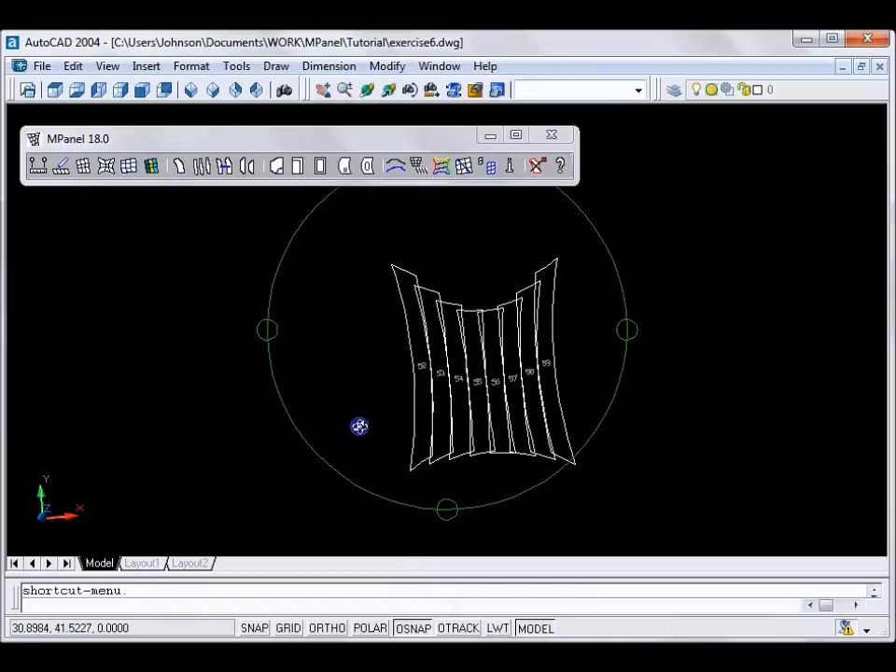In this exercise, we'll learn how to prepare a set of panels for production. We'll start with this pre-existing set of panels, and the first thing we'll do is use the Panel Arrange tool to space these panels out horizontally, with the panels oriented vertically.

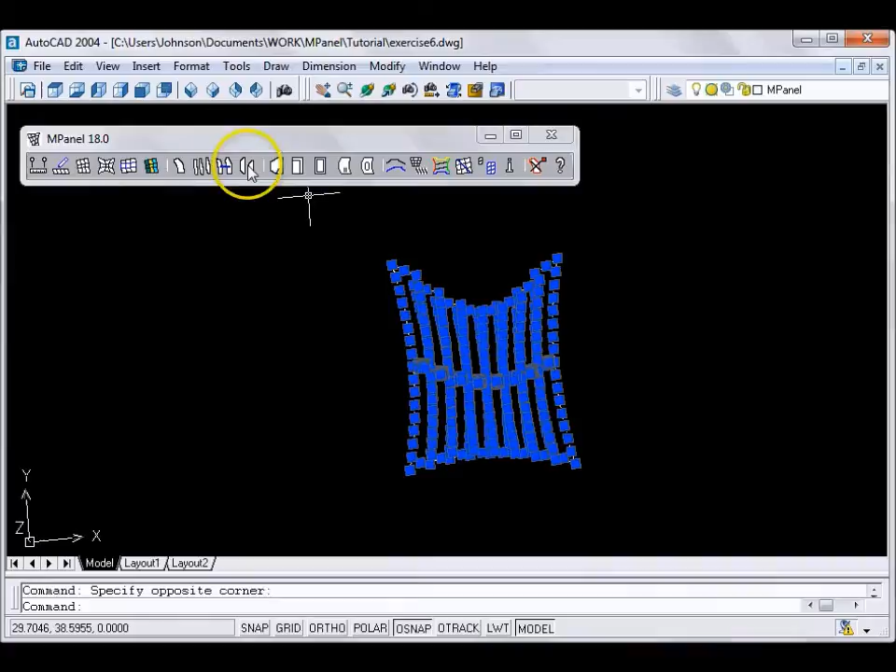We'll first go to the options under the Panel Arrange tool, and we'll specify a panel spacing value. For this example, we'll use a panel spacing of 1 meter. Click OK. Then select all of the panels and run the tool. Now we have our same panels spaced out horizontally.

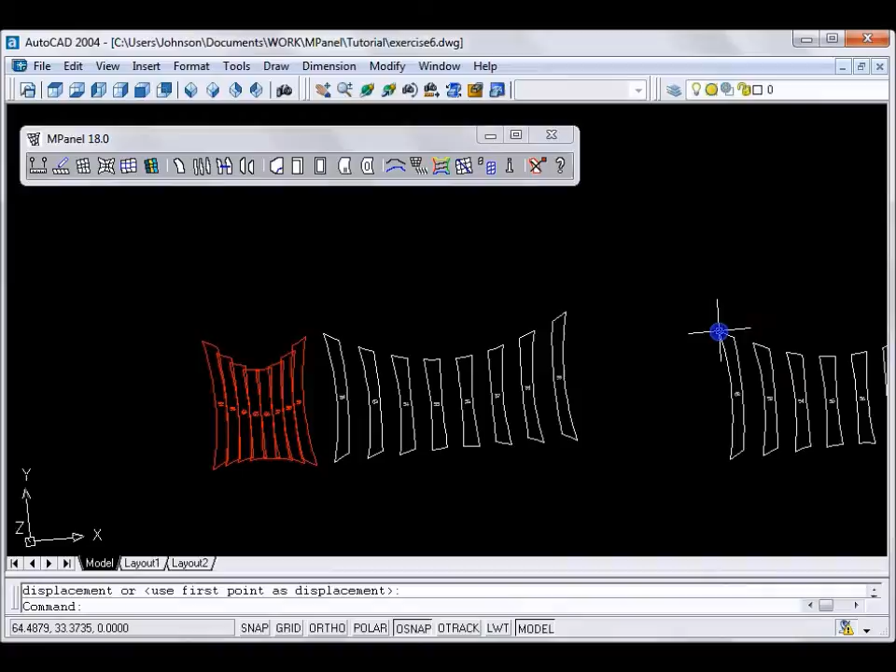Before we move on to the next step, however, we'll go ahead and make a copy of this set of panels, and we'll put it over here. And throughout this exercise, we'll continue to copy the panels after each section so that by the end we'll be able to look back at our progress step by step.

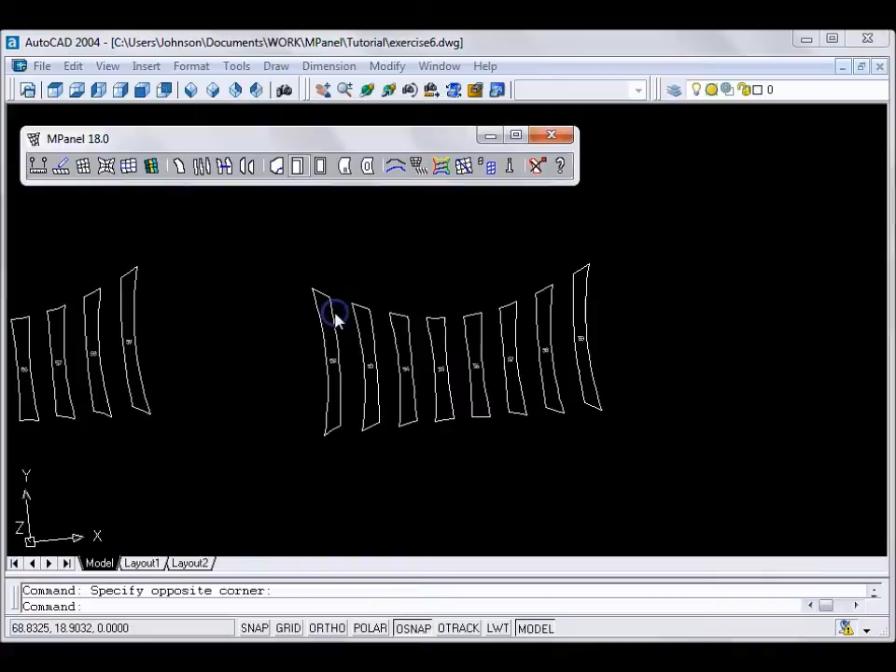Now we're going to compensate the panels using the MPanel Compensate Panels tool. This means that we'll deliberately shrink the panels so that when they are stretched to their true size, they are pre-stressed. If we don't do this, the fabric will be loose when it is installed. The amount of compensation required depends on the fabric and the pre-stress required.

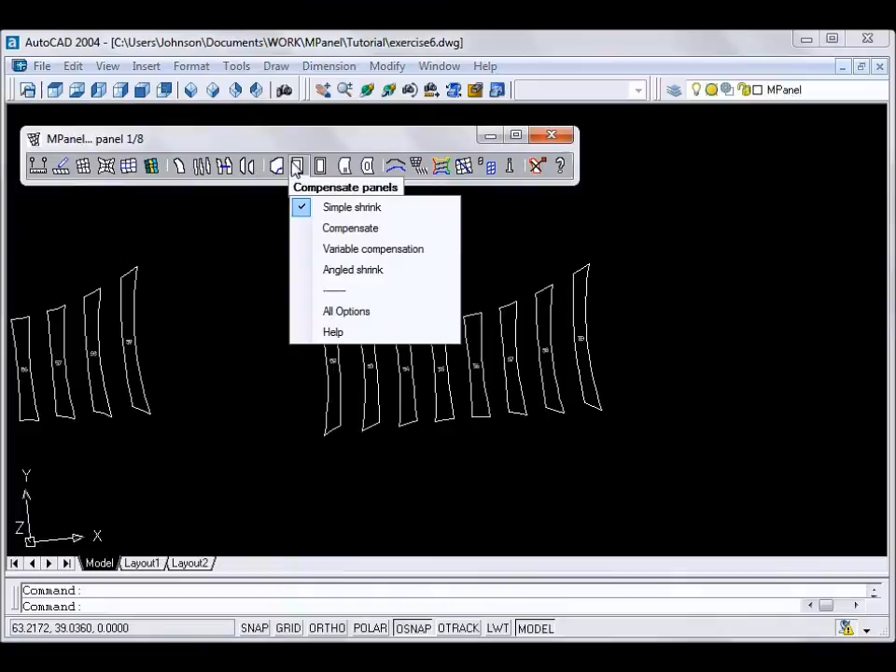Here we're specifying a 3% weft with a 3% warp and a simple shrink. Select all the panels and run the tool. When we compare the new panels in white to the old panels in red, we can clearly see how the new panels have been shrunk.

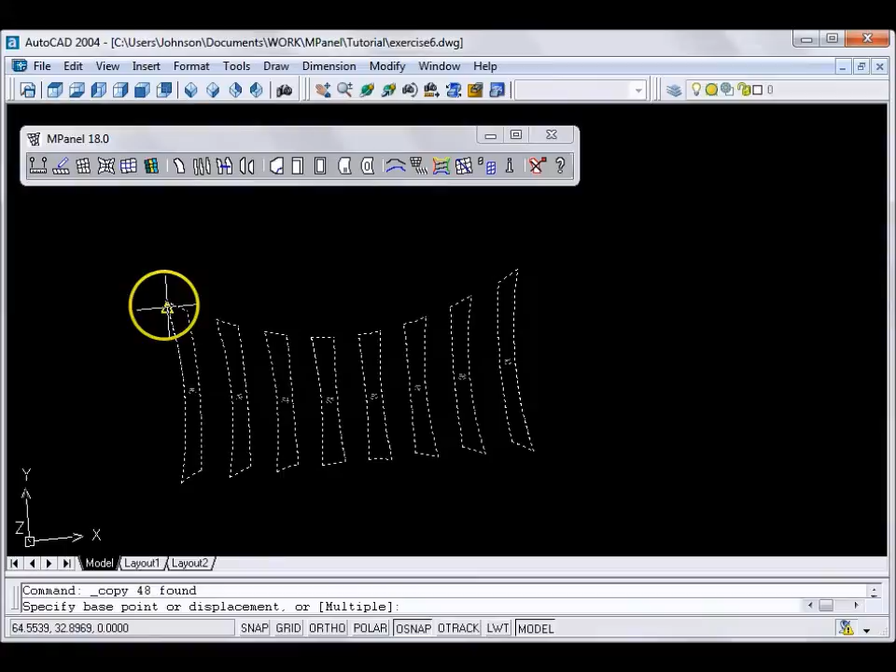The next thing we'll do is add a seam allowance. First we'll make a copy of this set of panels like we did last time. Just put it right over here. And then we'll go to the options under the Seam Panels tool. Usually, we would specify different seams on different edges, but to keep things simple here, we'll just specify a normal seam with a width of 0.1 on all sides.

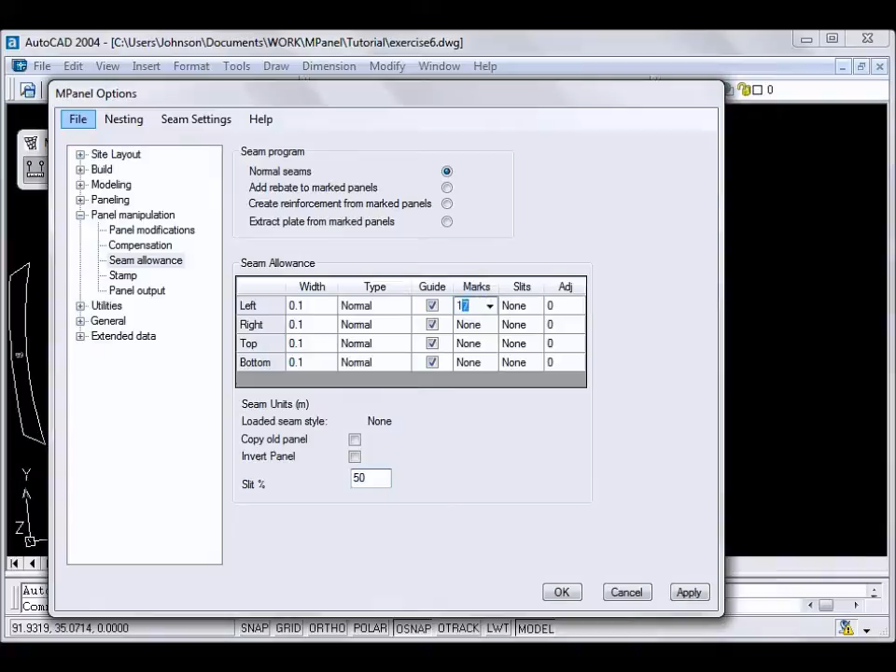We'll also specify guidelines to show where the next panel attaches, along with 17 lineup marks on the right and left edges to help in assembly. Click OK, select all the panels, and run the tool. When we zoom in, we can see the new seam, along with the 17 lineup marks.

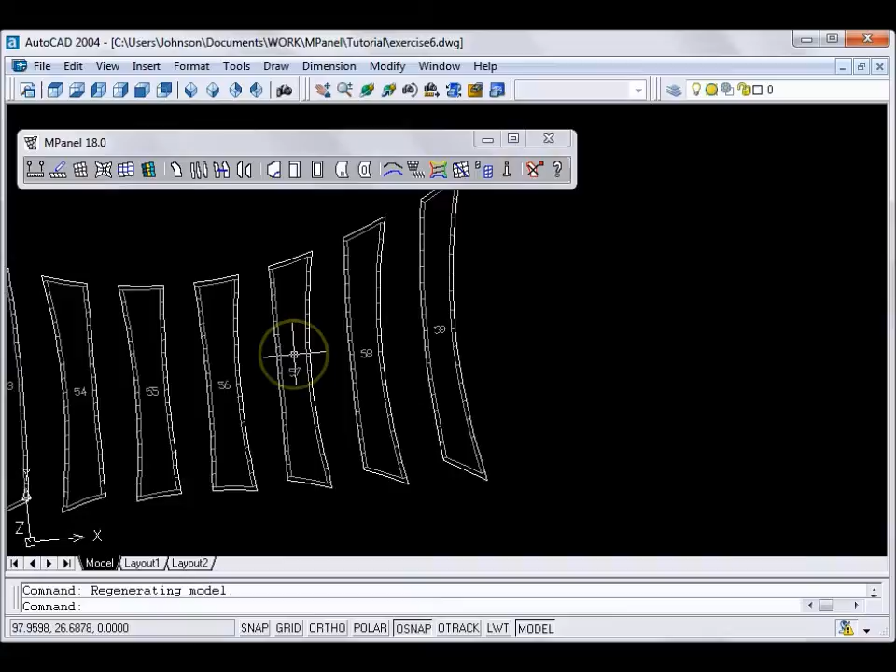Now we'll move on to the stamping section. Let's go to the Stamping Options, and we'll elect to stamp the panels according to the panel ID number, which is the same number that up to now has been in the middle of each panel for reference purposes. This set of panels was labeled 52 to 59.

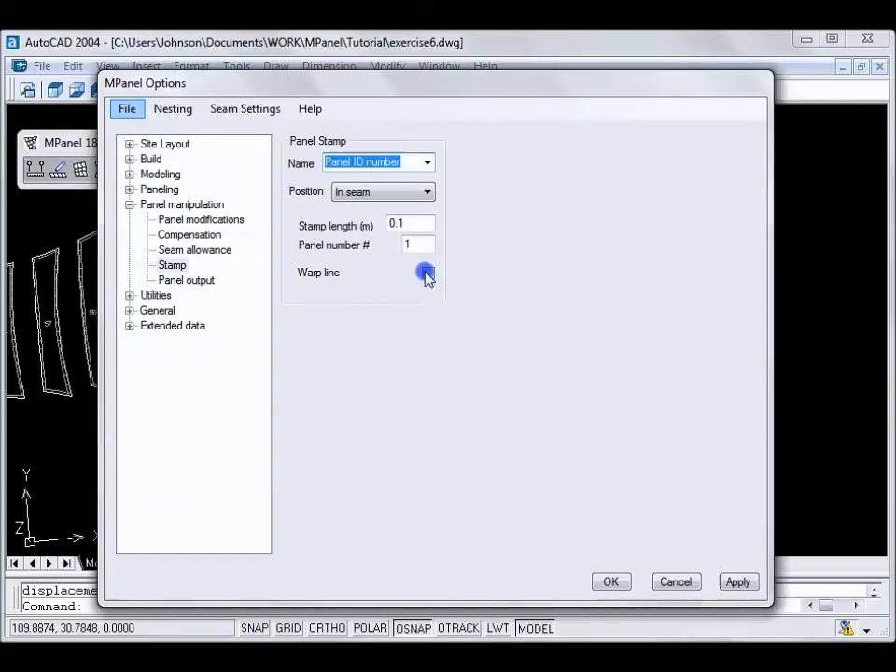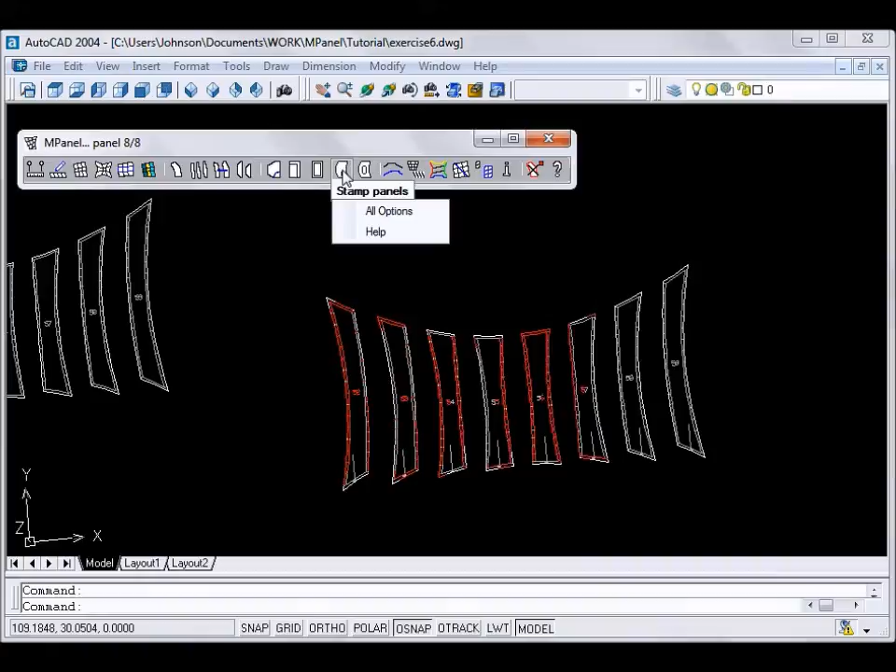We'll also include a warp line, which reminds us which way the fabric goes, and we'll specify a stamp length of 0.1. Click OK, select all the panels, and run the tool. Still running. On each panel we now have a warp line and a panel ID number in the bottom seam.

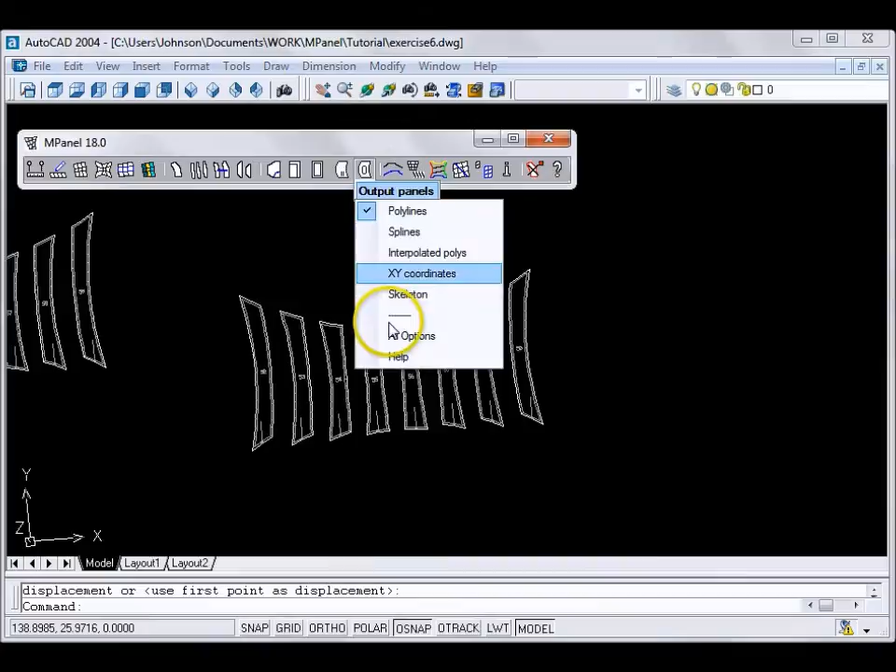Now we'll output the panel. Let's make a copy again. Put it right here. And then go to the Output Panel Options. If the panel is going to an automated cutter, we'll use the Polylines Output option. The panel has to be split into different layers, such as C for cut, A for annotation, etc. You can customize the terms used to describe each layer to suit the specific requirements of the machine you're using.

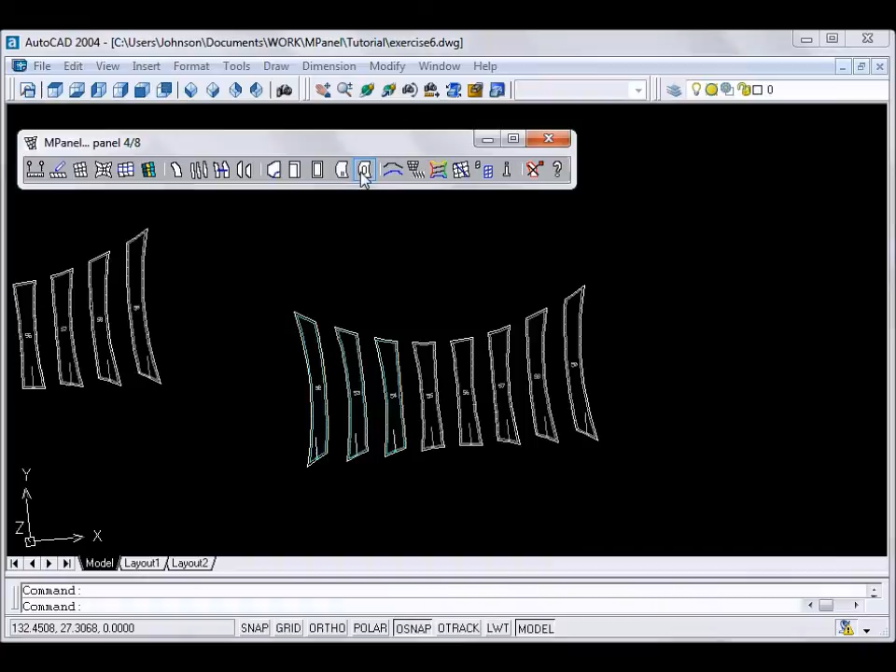Click OK, select all the panels, and run the tool. Still running. In this example, I've specified different colors for each layer in order to distinguish them. Let's take a closer look. Now all of our different markings are on a different color marked layer.

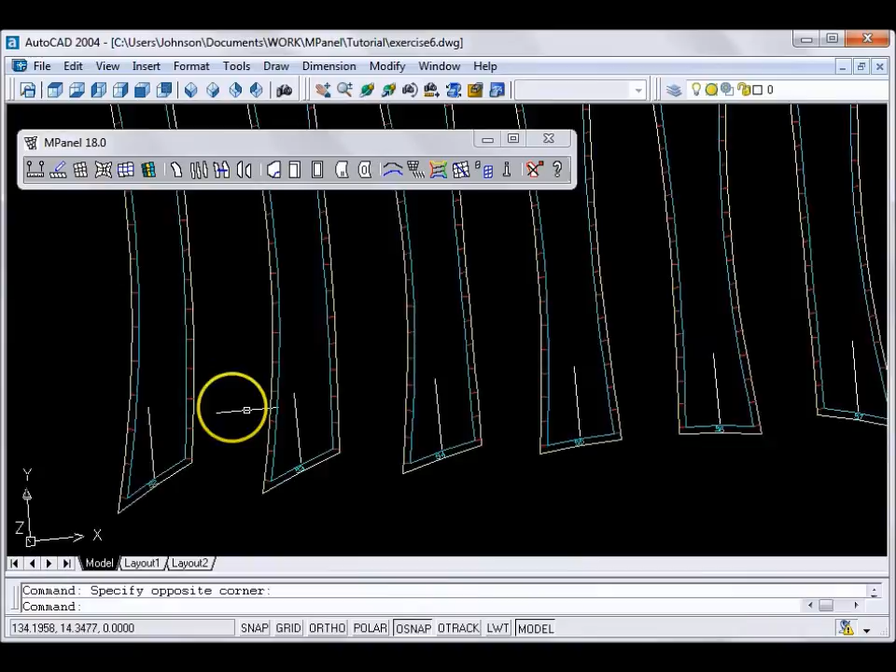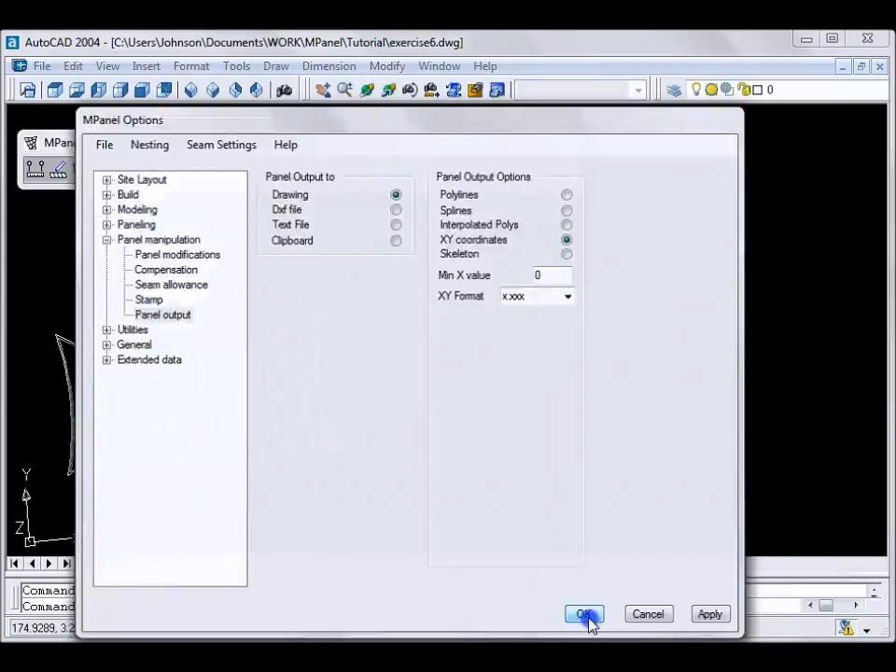If the panel is not going to an automated cutting machine, but is instead going to be hand cut, then we output the node coordinates. Let's return to the output options. This time, instead of choosing polylines, we'll choose XY coordinates. Click OK, and this time we'll just select one or two panels to demonstrate, and run the tool.

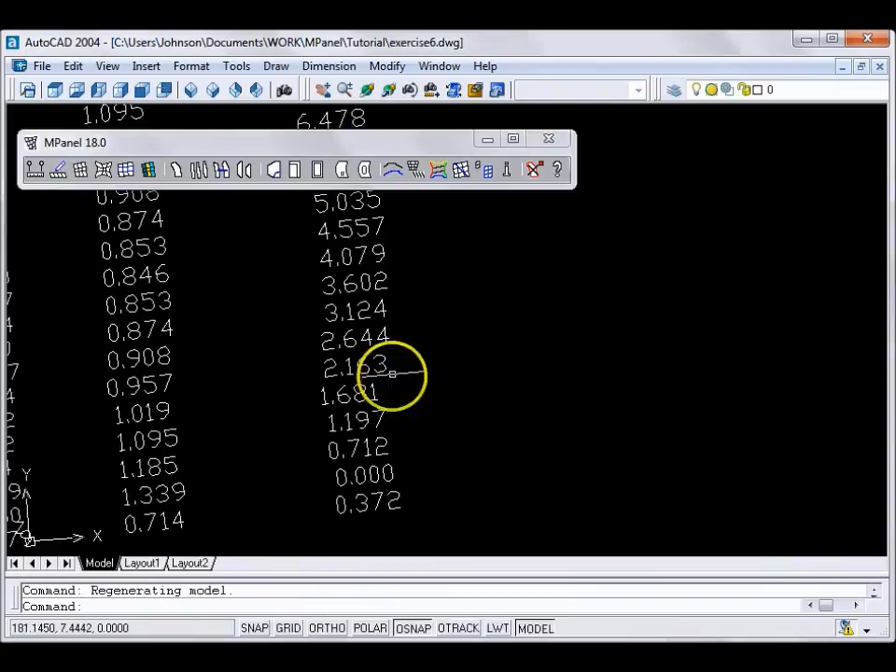Now we have all of the individual coordinates of the panel, which can be used to cut the panel by hand. Another more basic output option is the skeleton drawing. This shows the main dimensions and the amount of curvature on each edge. While this can be used for production, it is also helpful when double-checking the panels.

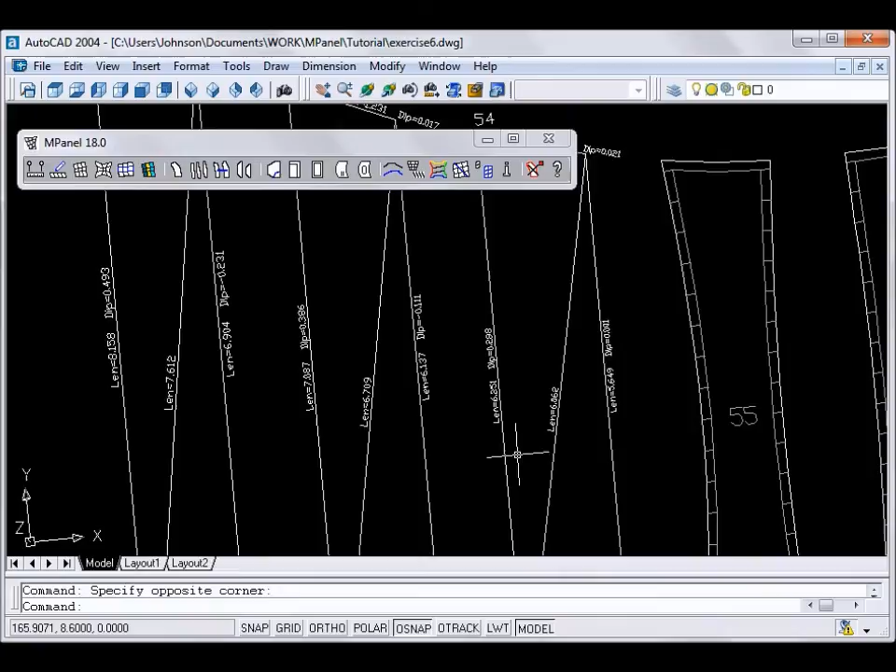It's important to realize that once the panels have been converted for output, they can no longer be used in MPanel for any further operations. We are now finished with our exercise, and we've learned how to output panels for production. If we zoom out, we can review each stage of our progress.